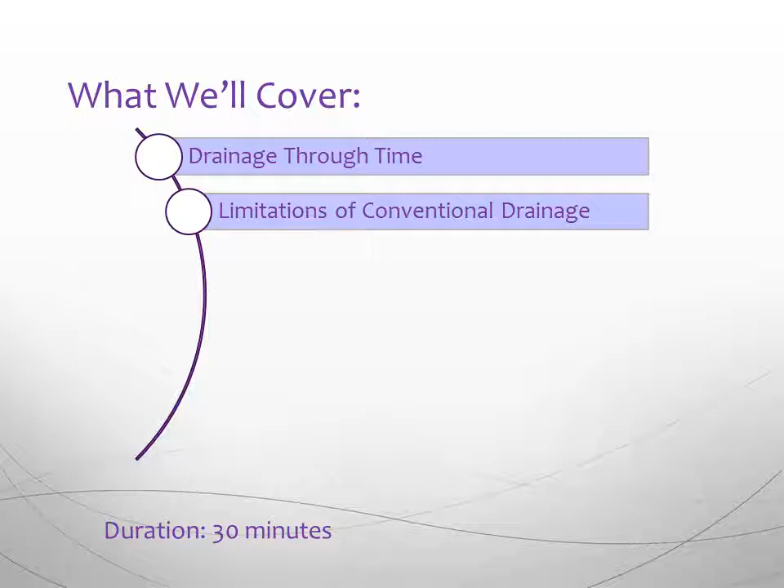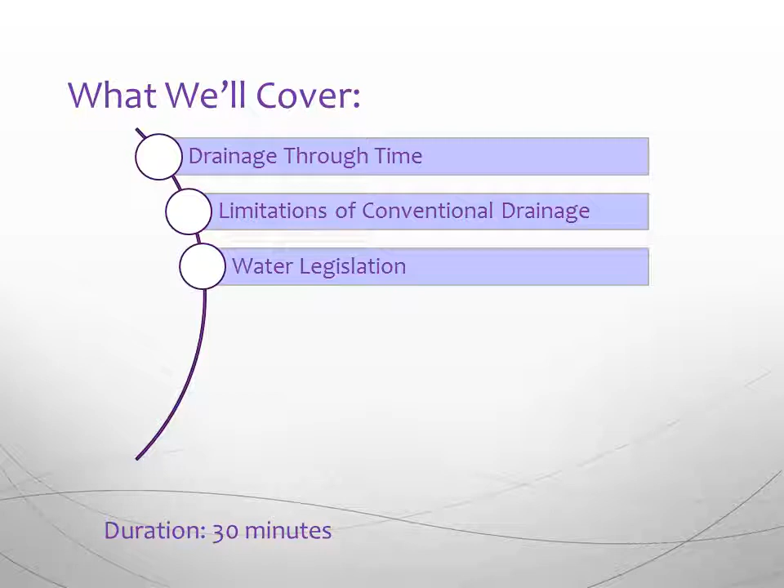During the last 100 years, it has been realised how important our natural resources are, and especially water. Over the last few years, legislation has been introduced specifically to protect the water environment, so an overview of this legislation is discussed next. Best management practice, or SUDS, has advantages over conventional drainage systems, so these will be highlighted in the next section.

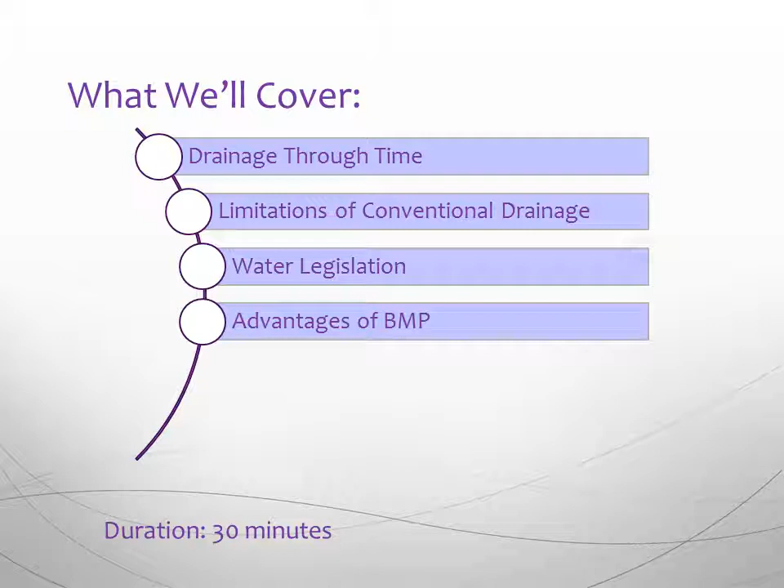The following two sections show an overview of the process of designing a SUDS system and selecting a suitable SUDS device. And the final section of the presentation shows a few images of SUDS devices in use and also highlights some of the disadvantages of SUDS. The presentation will take approximately 30 minutes to complete.

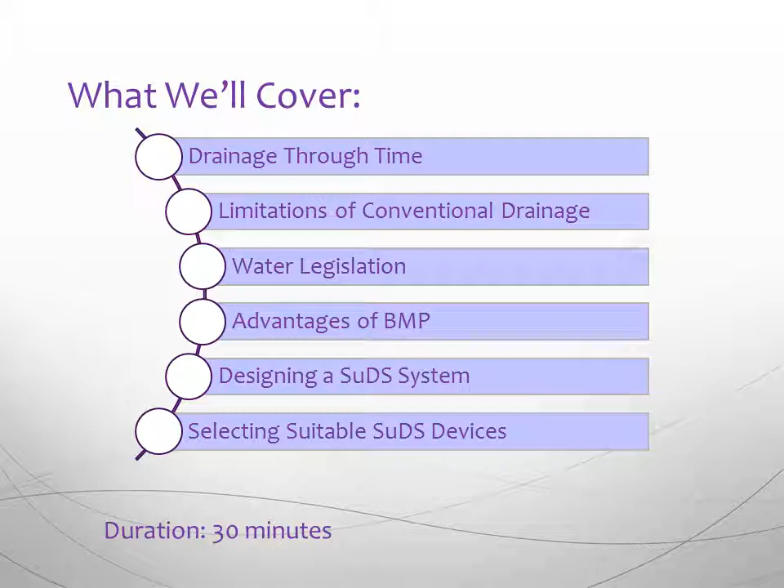Drainage throughout time. Drainage systems are probably as old as mankind. It is not inconceivable that the earliest cave dwellers would have dug channels in the cave floor to direct water runoff from the cave roof away from the living and sleeping areas. The earliest drainage systems in Scotland date back 3000 years BC. Basic toilets within recesses of the stone huts in Orkney at Skara Brae had drained outlets, and there were simple drainage systems under or outside the buildings.

By the early 1700s, nearly every home in towns and cities like London had privies with a cesspit beneath it. All the human waste was collected in these cesspits, which smelled terrible. These cesspits had to be dug out and the contents removed regularly. Rainwater from the roofs and the roads continued to be drained into the nearest watercourse by open ditches.

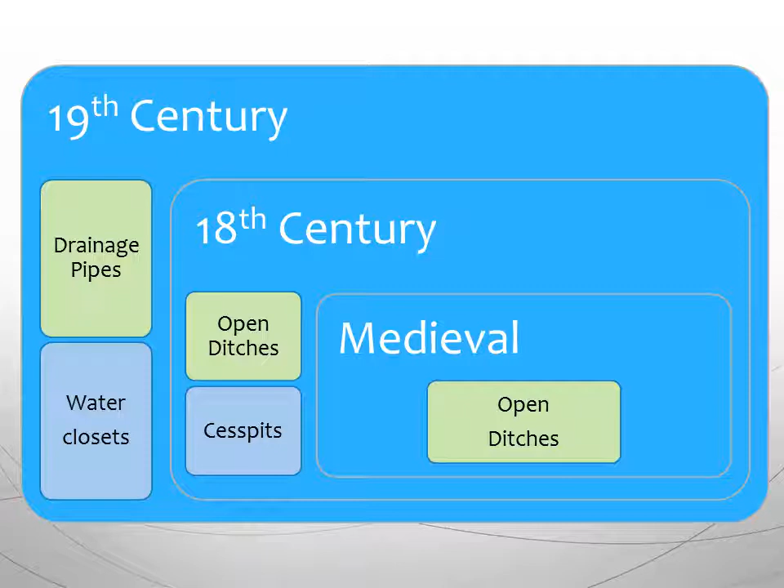By this time, most of the open ditches for rainwater had also been replaced by drainage pipes, so the surface water drainage pipes were used to receive the foul water. This is probably the start of the combined sewer systems of the Victorian era. In London, the water from the combined sewers discharged into the River Thames. This caused a crisis in 1858 when the smell of the River Thames became so overpowering that the curtains in the House of Commons had to be soaked in chloride of lime to protect the noses of the sensitive MPs.

Cholera epidemics in the 1830s, 1840s and again in the 1850s awakened the need for a solution. Between 1853 and 1854, a London doctor, John Snow, identified the cholera in London was caused by sewage-contaminated water from the River Thames. This eventually brought about the introduction of water treatment systems for sewage.

The limitations of conventional drainage. Conventional drainage continued to be used throughout the 20th century for surface water. Some was combined with foul water and treated in water treatment plants, but most surface water was simply discharged into the nearest watercourse.

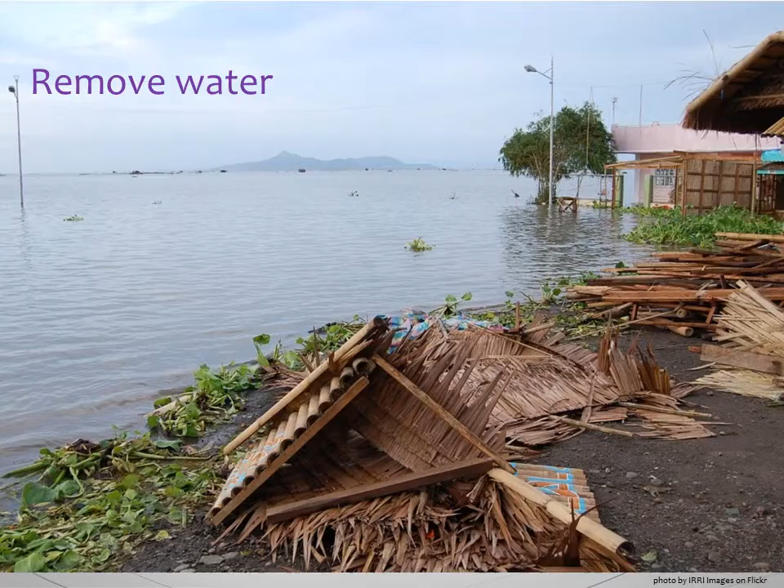The original objective of surface water drainage was to remove water from the streets and the houses. During severe weather conditions, conventional drainage only has limited capacity to store excess water. As the amount of water increases, the pipework reaches capacity. Eventually it overflows, causing flooding.

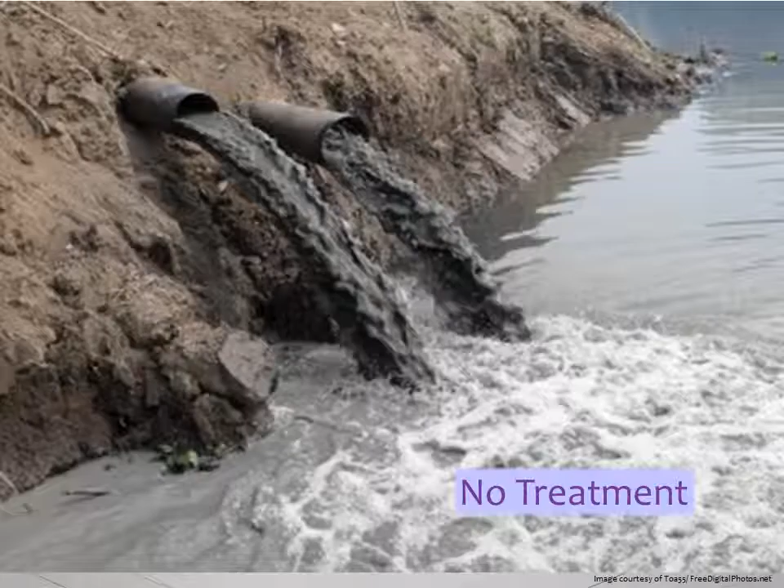No consideration was given to the pollution that might be caused. Water runoff can pick up various polluting substances, such as animal feces, debris from human activity, airborne pollutants, and hydrocarbons from vehicle emissions. These are transported by the water into the watercourse, causing pollution. If the watercourse is a source of drinking water, this could cause health problems, including diseases such as cholera.

This waste transported into the rivers might be rich in nutrients, triggering eutrophic conditions in fresh water. Eutrophic water encourages the increase of growth of algal blooms and microorganisms. Both can cause reduced dissolved oxygen levels in the water, leading to reduced biodiversity. Conventional drainage systems have no method of removing these pollutants before they reach the natural environment.

One of the most significant in recent years has been the European Water Framework Directive. This has been transposed into Scots law by the Water Environment and Water Services Scotland Act 2003 and is implemented using the Water Environment Controlled Activities Scotland regulations, very often simply referred to as CAR. The regulations first came into force in 2005 but have now been reviewed and updated in 2011.

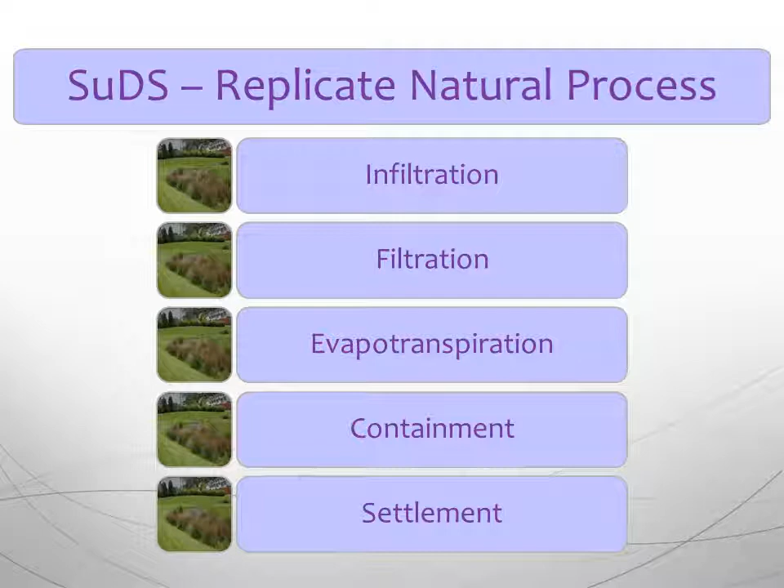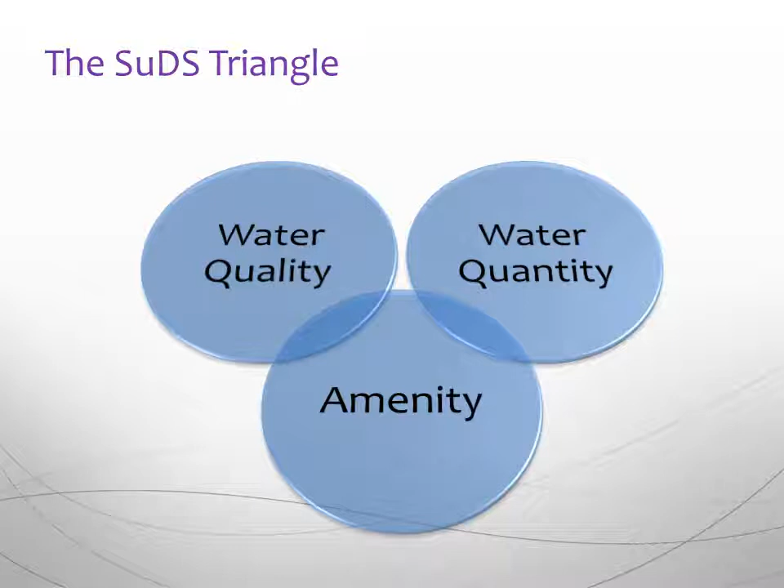The concept of SUDS is epitomized by the quality, quantity and amenity triangle, which is shown in this slide. Designing a SUDS system. The process of designing SUDS consists of information gathering, estimation, and finally determining what will happen to the water.

The catchment area is the first piece of information that is needed, as this will determine the amount of water that the SUDS devices need to deal with. The catchment can be determined from ordnance survey maps and land acquisition plans, etc. This area is normally the development site, but the surrounding area may also need to be considered. If the local topography is likely to introduce runoff onto the site from surrounding higher land, then this will also need to be considered.

The impermeable area is usually determined by adding up the total road surface, footpaths, building roofs, driveways, parking areas and any other hard standing intended for the developed site. If the development includes permeable design for car parking, footpaths, etc., this needs to be considered and not included as part of the impermeable area.

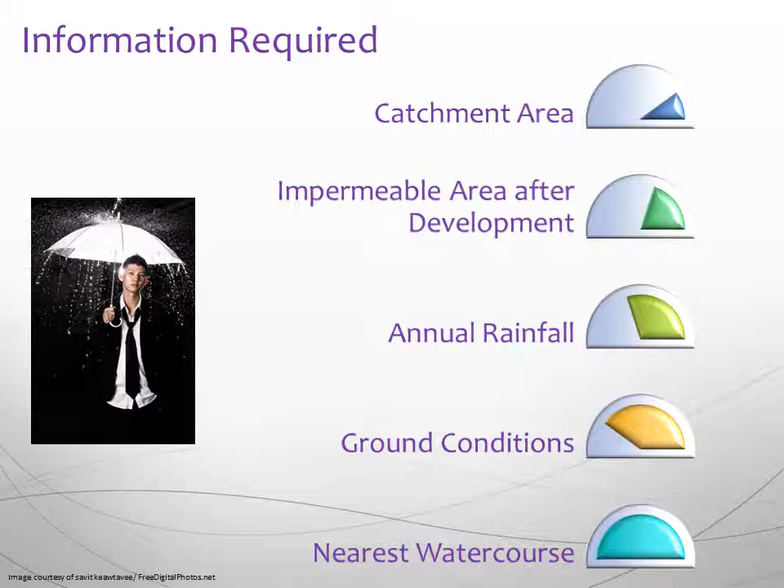Not all the information can be gathered from the site visit or published material. As already mentioned, the soil index needs to be calculated from the winter rainfall acceptance potential of the area, and there are other pieces of information that need to be calculated.

During an extreme rainfall event, there will be more water generated by the storm than can infiltrate into the ground. The excess water will either run off from the site into the nearest watercourse or may cause flooding either on the site or off the site. Developing a site will increase the impermeable surfaces, and this will reduce the permeable area that the water can infiltrate into. A developed site will therefore have a higher water runoff during extreme rainfall than the undeveloped site.

It is therefore necessary to calculate the runoff flow likely during a rainfall event on the undeveloped site. This is known as the pre-development flow. Once the pre-development flow is known, it is then possible to calculate the amount of runoff from the site after the development is complete. This is the post-development flow.

The final piece of information required will be the volume of water that will run off from the site during the rainfall event. This will be determined by the runoff flow rate and the duration of the storm. This is needed to correctly size the SUDS device.

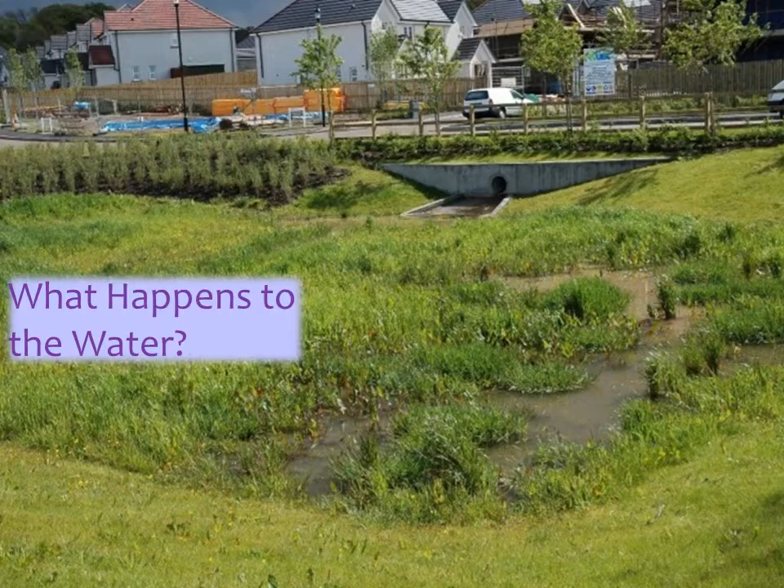The next important consideration when designing a SUD system is what is going to happen to the water. If the ground percolation rate is suitable, then once the water has been cleaned through a suitable SUDS device, it could be allowed to infiltrate naturally into the ground. If the ground has poor percolation conditions, then other options may have to be considered.

Can the water be discharged into a nearby watercourse? If it can, you may have to check with the Scottish Environment Protection Agency, as any discharge into natural water is considered a controlled activity under the Water Environment Controlled Activities Scotland regulations, although a small surface water discharge might only need to comply with the general binding rules of the regulations.

If there is a public drainage system nearby, then the SUDS discharge may be able to connect straight into this, but consultation will be required with Scottish Water before this can be done.

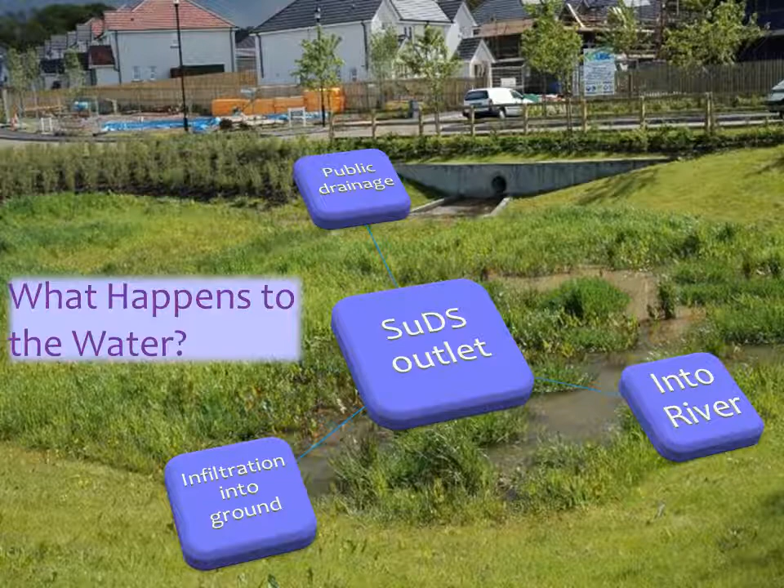As already mentioned, the meteorological data is available from a set of Wallingford rainfall maps. These maps, which include the entire British Isles, include the Standard Annual Average Rainfall, or SAAR, which is expressed as the total rain falling in a year and reflects the wetness of the area. Two other maps show the 5-year return period rainfall with a duration of 60 minutes and a 5-year return period rainfall with a duration of 2 days.

Another map indicates the ratio of rainfall amounts. This is the ratio of a 5-year 60-minute rainfall against the 5-year 2-day rainfall and reflects the variability of rainfall at a location. The final map in the set is the Soil Survey map. This provides winter rainfall acceptance potential, or WRAP, which is given as 5 soil types representing the ability of soil or rock to allow infiltration in the winter. The 5 soil classes range from sand to heavy clay or bare rock.

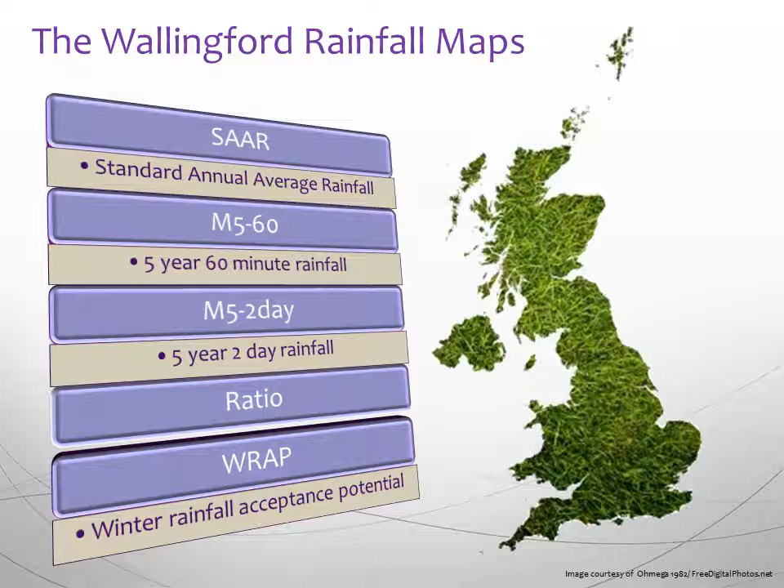The modified rational method is one of a number of different methods to work out the rainfall intensity, maximum flow and volume for a specific development site during a specific rainfall return period. The modified rational method is suitable for small developments.

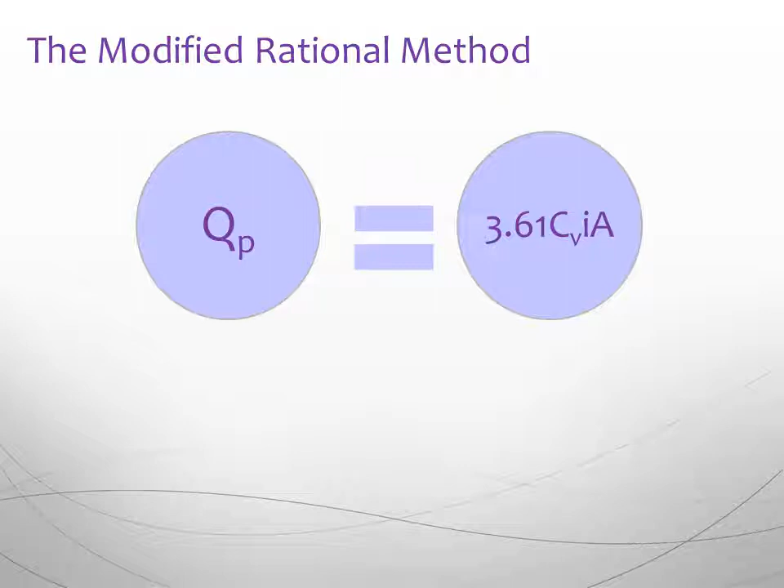QP is the peak discharge expressed as litres per second. CV is a dimensionless coefficient representing the volumetric runoff and the percentage of runoff divided by 100. I is the average rainfall intensity during the time of concentration and is usually given in millimetres per hour. A is the contributing catchment area and is given in hectares.

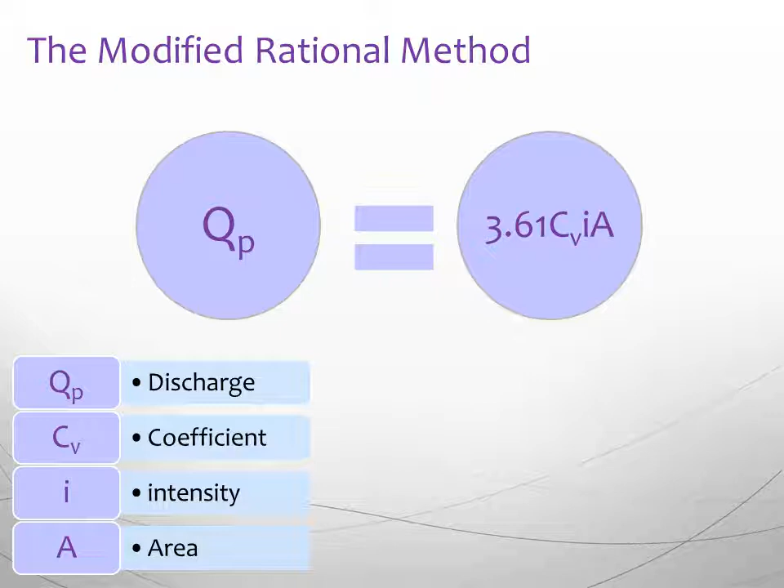Selecting a suitable SUDS. SUDS can take the form of both procedures and devices. Procedures can include safe disposal of pollutants, detailed instructions on unloading oils and chemicals in a factory, asking dog owners to collect their pet feces for safe disposal. But irrespective of the type of development, residential or industrial, prevention should always be considered first. Containment should be considered on industrial sites to prevent chemicals or hydrocarbons polluting the environment.

To select suitable SUDS devices, consideration should be given to where the water can be disposed of. Can it infiltrate into the ground? Can it discharge into a nearby watercourse? How big is the development? Will one SUDS device be sufficient, or will several devices be necessary? Will source control be sufficient, or will site control also be necessary? How much space will be available for SUDS? Does the slope of the ground eliminate certain types of SUDS design? Ponds, wetlands and detention basins will need a large amount of space.

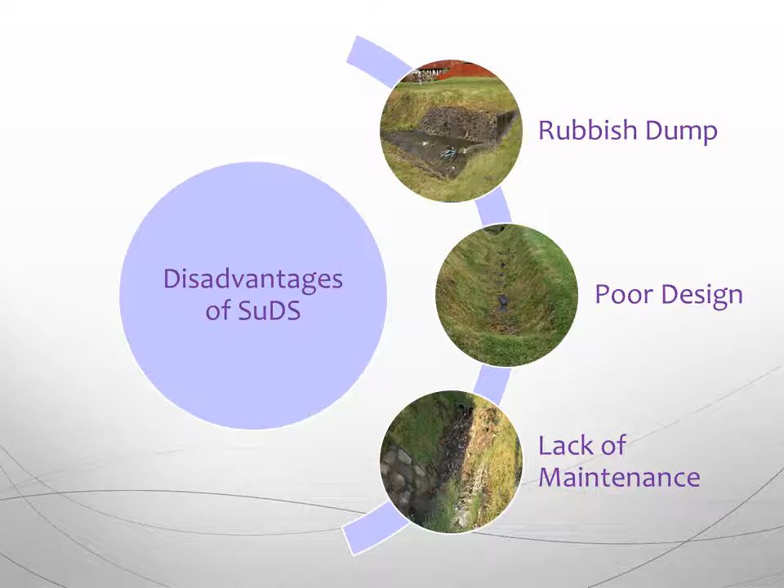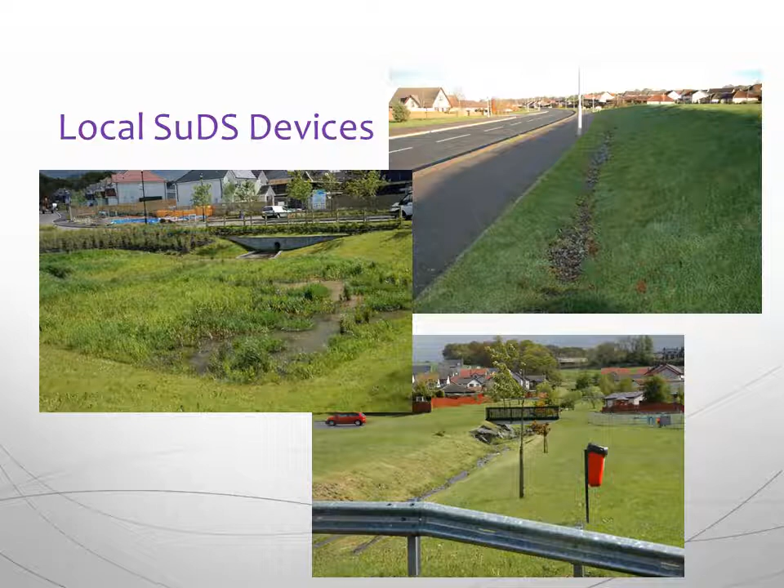This image shows a larger picture of the retention basin from the previous slide when it was first constructed. The construction of the housing estate in the background, as you can see, is still taking place. 5 years later, the vegetation around the wet pond area has been allowed to grow, creating a miniature wetland pond area. An interesting point is that the only barrier between the SUDS device and the public road is a hedge to protect the inlet culvert. The rest of the site is accessible from the public road.

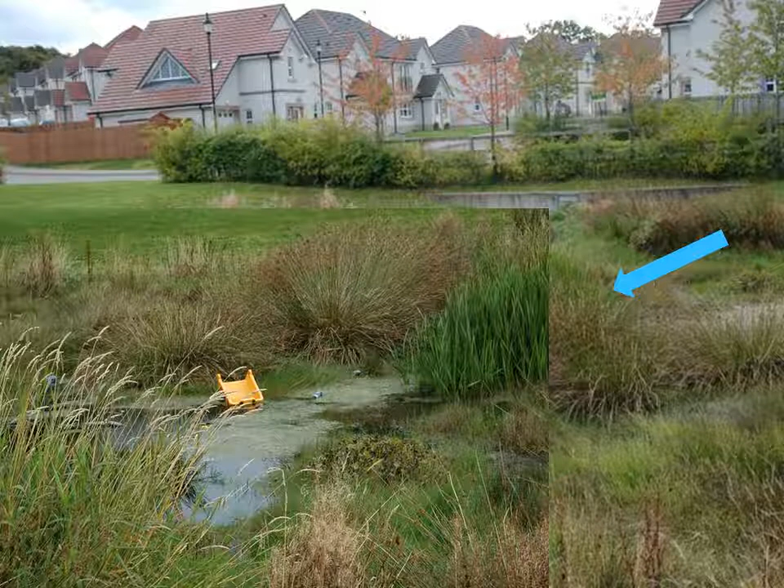Referring back to the slide on considerations when designing a SUDS system, some thoughts need to be given to safety and health risks. The photograph was taken in the direction of the blue arrow that shows a small child's toy dumper truck partly submerged. This suggests that children are playing near the wet pond area, and this could be a health risk. It's also interesting to note that there are beer cans that have been dumped into the pond.

This presentation has covered a brief history of drainage from the Stone Age until the present. It has highlighted that conventional drainage was only designed to remove water, with no method of treatment and only limited capacity for storage. This resulted in health risks, reduced biodiversity and increased flood risk.

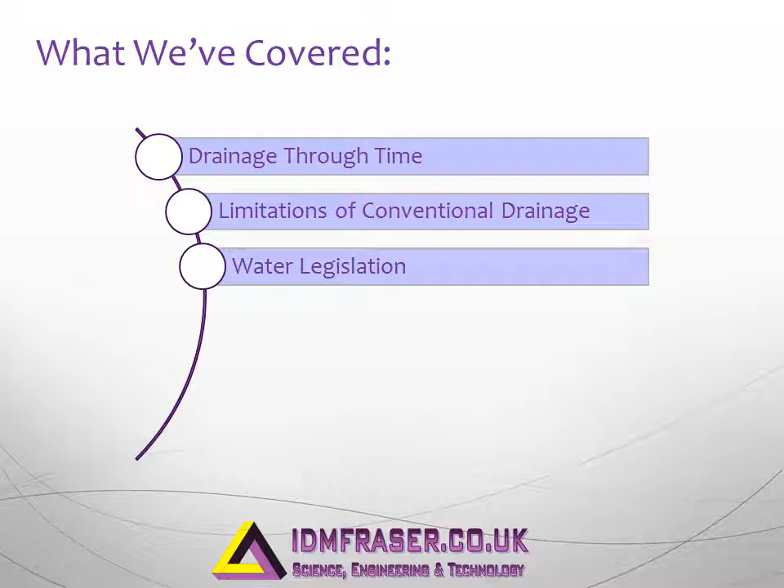Over the last few years, legislation has been introduced specifically to protect the water environment, in particular the Water Framework Directive, the Water Environment and Water Services (Scotland) Act, which has been implemented using the Water Environment (Controlled Activities) (Scotland) Regulations. Best Management Practice, or SUDS, can be used to transport surface water, provide a method of water treatment and provide attenuation and improve amenity: the SUDS triangle.

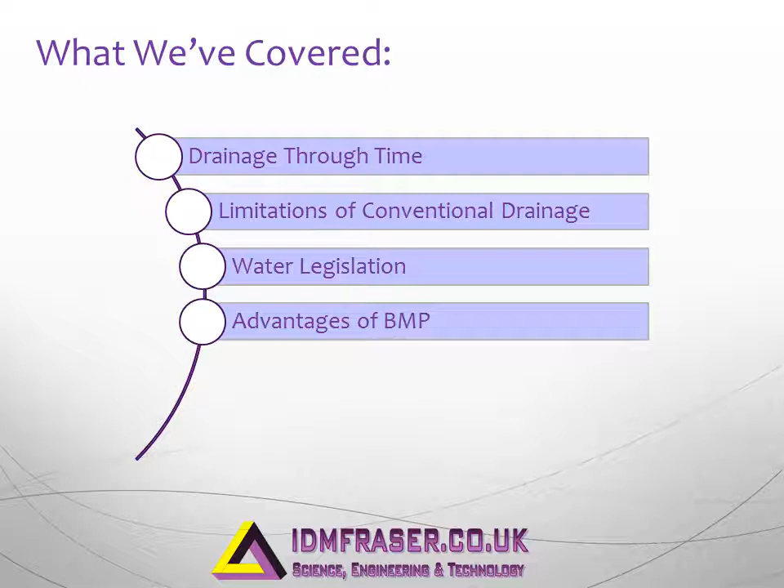To design a SUDS system, the catchment area, impermeable area, annual rainfall, ground conditions and nearest watercourse need to be obtained. Pre-development and post-development flow can then be calculated along with the volume of water that is generated. Rainfall data is available using the Wallingford rainfall maps. The modified rational method is just one method that can be used to attain the peak flow.

Selection of a suitable SUDS device will depend on the size of development, ground conditions, amount of space available and the location of the watercourse. Poor design, lack of maintenance and being used as a rubbish dump are some of the disadvantages of SUDS.